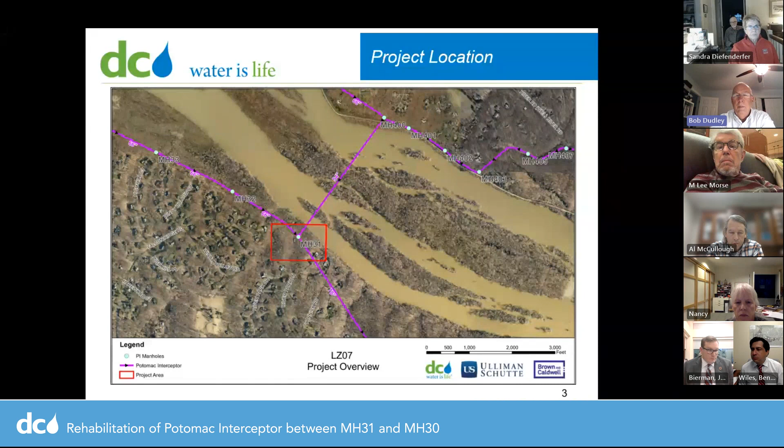I think everybody knows where we are, but just as a quick background - I know the river's dirty in this picture - to orient ourselves, coming from the left-hand side on the Virginia side of the river is a 66-inch line from Loudoun and Fairfax. Coming across the river from WSSC is a 54-inch, and then emanating from that spot southward is a 78-inch that quickly transitions into a tunnel. The site is highlighted here inside the red box on the screen. Next slide, please.

So what were we doing? Again, we've been with you guys for a bunch of years going through where we are, so some of you have seen this a bunch of times, some may not have. The 66 coming down from Loudoun is up on the left-hand side. Coming in from about 2:30, 3 o'clock is the 54-inch from Maryland, and exiting out at the bottom was the 78-inch.

A bunch of internal investigations performed by DC Water had indicated that the pipe was deteriorating, and the intent was to come in and replace it. We'd come up with, working between the contractor, their design build team, and DC Water's team, an option to do this in the dry. If people remember, the next manhole downstream is over a mile downstream, so bypass pumping is not something that could be achieved during the work.

So the idea was to build a box on the top manhole, we're calling that manhole 31.5, and divert over to the circular area in the middle over top of the 54, and then lastly convert that back into the 78-inch pipe just before it goes into the tunnel and heads on from that spot. We've been at it for about a year and a half, somewhere in that range, and pretty far along with about 6 months to go. Tijuana, next slide.

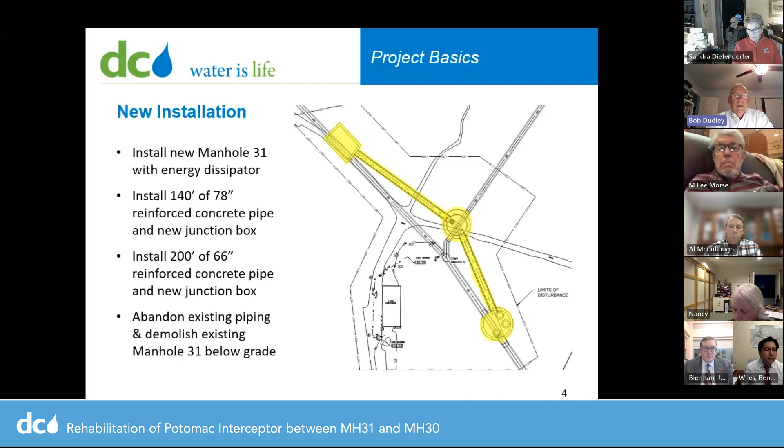When that first happened, we got alerted by the folks on site, and DC Water's team and everybody got together. One of the first things completed was to follow the emergency response plan. DC Water had, developed with the design build team over a couple years, a robust emergency response plan to be used anytime there was an emergency on the site.

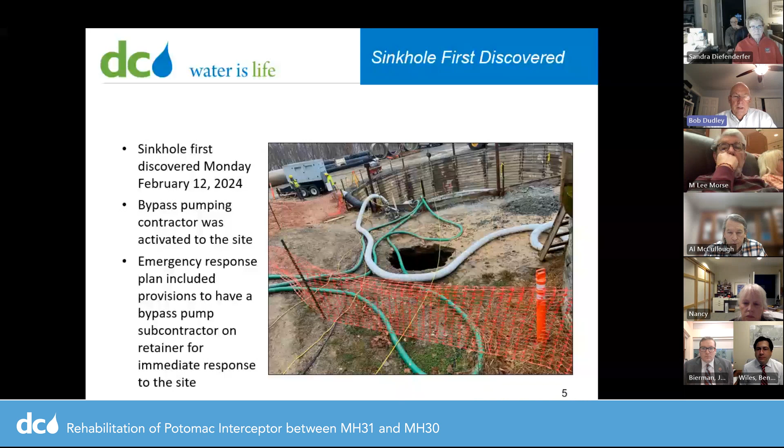Can you jump to the next slide? One of the cornerstones of that emergency response plan was to have retained a bypass pumping contractor. For those in the engineering world, if you had an emergency tomorrow and just called up and said, I need an emergency bypass pump, that's probably not happening. But DC Water had put them on retainer, actually paid them on a monthly basis to have them available for a failure. So one of the first emergency things that happened right off the bat was to get the emergency bypass contractor on board and out at the site, and they immediately were getting engaged.

So now I'm going to pass it over to Al. I think the next slide's passing over to Al, if I'm correct. Al's from Ulliman Schutte, directing the work on the site.

Good evening, everyone. As Bob noted, on Monday our crews first noticed this sinkhole, which immediately put us into an emergency situation. It was not located over an area where we were actively working, but we identified that this is a very risky situation, and we immediately began working around the clock with a focus on securing this situation while protecting our neighbors, the environment, and our people completing this work. We've been working around the clock since that time.

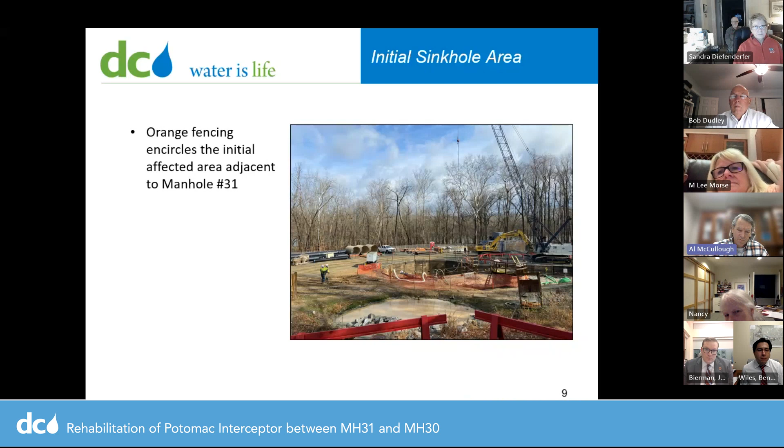See if we can roll to the next one. On Tuesday night, the situation remained fairly stable Monday into Tuesday, and on Tuesday we started to see a little more degradation. On the night of Tuesday the 13th, we got a lot of rain in the region overnight, and the flows within this pipe increased overnight. Our actual high flow period is approximately 8 till midnight, and then it starts to slow down. During that period, we started to see much more degradation, a very unstable excavation, and scour of that water, removing the subgrade, removing soil, and collapsing soils, which is a very unsafe situation and unstable excavation.

By Wednesday, there had been continual areas of collapse and some more failure. We started to see some water trickle into our excavation, but we were able to remove some obstructions on Wednesday. We were able to install some trench boxes, which are for slope stability, into that water area. You can kind of see in the picture just how big that area had grown to. So we had attempted to reach a stable situation on Wednesday.

Overnight, Wednesday night, which is—let's scroll to the next slide.

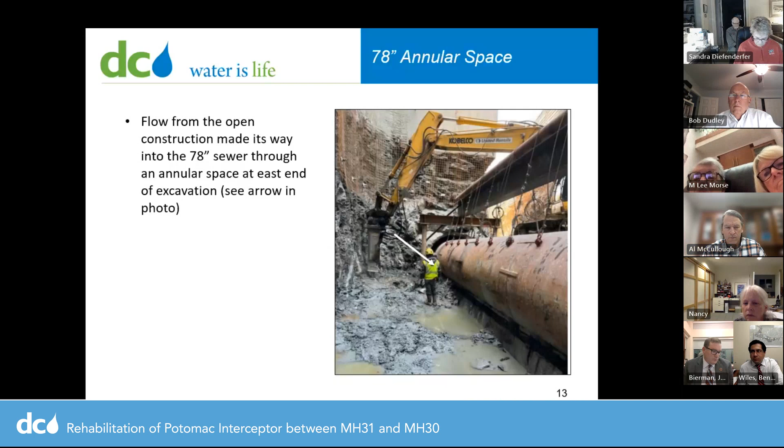And as Bob noted, that area is where we, as a team, developed concerns and wanted to share those with you. Let's see if we can roll—pardon my graphics. At one point in time, that white arrow pointed towards the annular space. I don't know what happened.

So that was our situation developing on the water. I will step you through our response so you understand what we've been working on.

We have been working to get this entire pumping system installed since Monday. That's the day we recognized it and initiated the response, and it's obviously a very significant response to get this type of system installed.

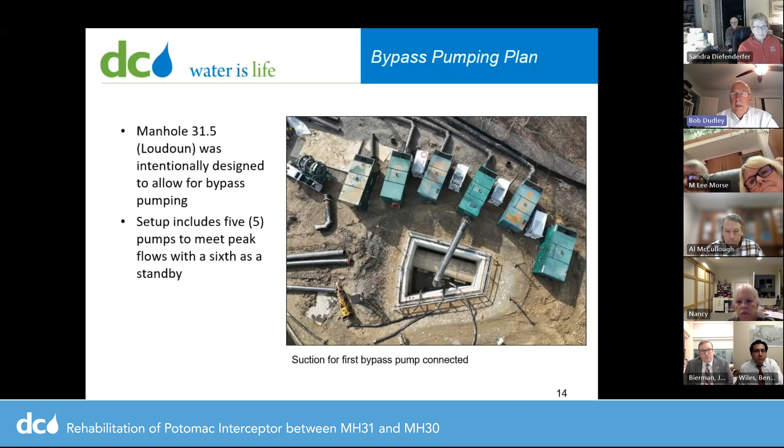On the discharge end of the pipes, that is where more of the challenges have occurred. This is a slightly confusing photo, I acknowledge, but it's a challenging situation. The pipes kind of zigzag across the site. Those are the discharge pipes of these pumps, and we have to route them around the upper slope.

We've actually built a steel bridge out to the top of manhole 31. We removed the lid of 31, and these pipes are being discharged down into the cylinder of that manhole. We've had to install 5 of these black discharge pipes and stack them all within that manhole. That's been a process—as each one was completed, we developed one more pump system of capacity.

We're targeting a total of 5 active pumps. As of the 18th, 3 pumps had been completely installed on piping and tied into this manhole. We were able to start a small cut in the pipe to induce some water into that box so we could start running these pumps and developing a run history with these pumping systems.

Because when we remove that pipe at that box we just looked at, we are very much an active pumping system at that point—we're relying on the system. We have completed a 4th pump over the weekend, which gets us about as far as we can go at this point. The 5th pump has to be installed and finished after the pipe is removed.

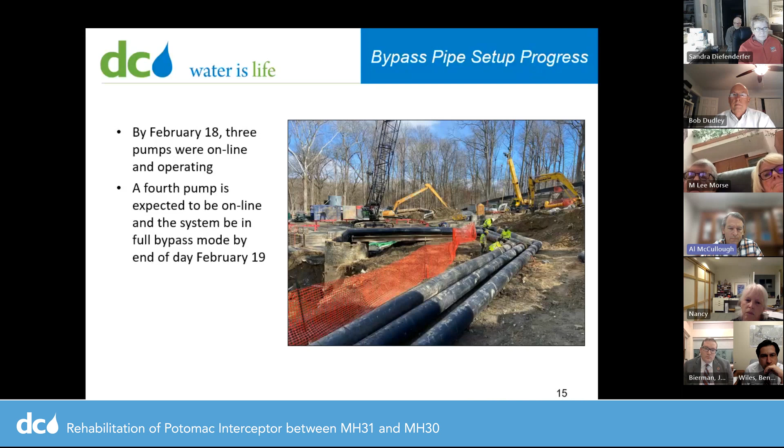This is now what the area looks like at the pump suction. We have installed, it's hard to count, but there are 3 of the suction pumps included. We are continuing to allow more water to leak into this box to allow these pumps to slowly come up to speed.

Slowly starting to remove the water from the system, and ultimately transitioning to where this becomes an on-site pumping station. That is a slow process to allow the pressure to slowly relieve into this box.

We're actively now working to continue to switch over to the full bypass capacity. It's a very slow process. We'll be continuing that overnight.

I think the fourth pump should come on in to be positioned and ready to be added to the fleet once that conversion happens. We're anticipating that fourth pump being in place by end of day tomorrow.

That would get our full bypassing system into service, which would alleviate the water flowing that we'd seen in some of those photos flowing through that excavation. We then move into the next phases of remediating that area and providing more stability and assuring a safe operation for all involved.

Bob, I could talk for days, but I'm sure people want to hear more stuff, so I'll hand back off to you guys. It's heading over to another Bob.

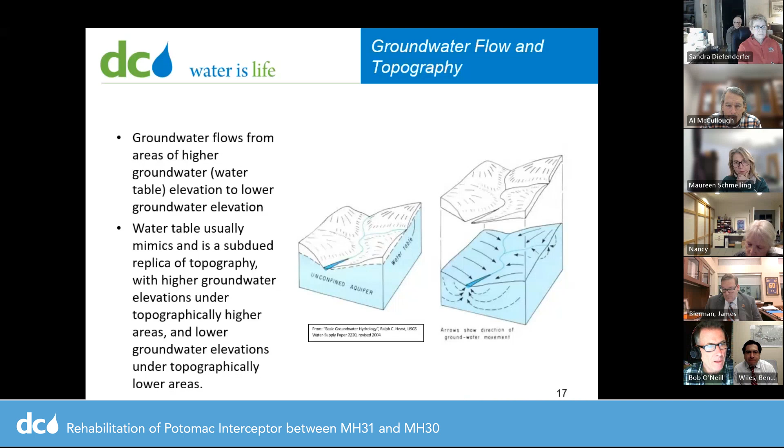Right after this, we got available to us well completion records for residential wells that have been installed and are used in this area. If you could go to the next slide, please.

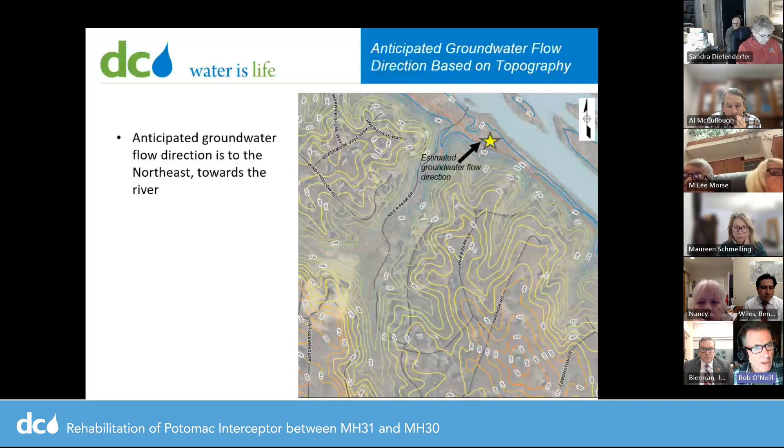So we looked at the well completion records—this is information that the driller puts down on a well completion report after they're done drilling a well. It tells you well depth, how deep the casing is, things like that. One of the pieces of information they ask for is what's called a static water level in the well.

After they're done drilling, they let the water equilibrate in that well. It gets to a certain point and stabilizes—that's our static water elevation, and they report that in the well completion report. It's basically a depth: if you took a measuring tape from the ground surface down, that's the distance to the top of the water table, or the groundwater surface, under non-pumping conditions.

So we took the ground surface elevation and subtracted that depth to water, which gives us a groundwater elevation at those points. This is the data from that, for the wells where it was available.

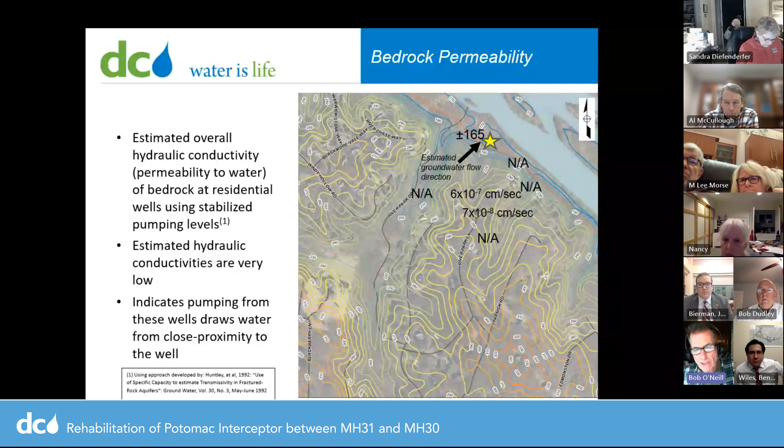And if I could go back to the point I missed, and I apologize for this - if I go back to the other slide. Actually, can you go back two slides? Yeah, so this is the slide I showed you before. This groundwater elevation was from before the release. We're seeing the groundwater flow direction go here.

So groundwater continued to flow towards the northeast. It didn't get high enough where it would have caused a flow reversal. And now that that water level is being drawn down again, it should return back to normal conditions.

So really the takeaway is groundwater flows towards the northeast, and even during the incident, the release did the same thing. The residential wells out here don't draw water from very far away from themselves, because when they operate, the water level drops down so quickly, that indicates that they're pulling water in from very close, and it doesn't pull in water from far away. So that's a summary of what we evaluated.

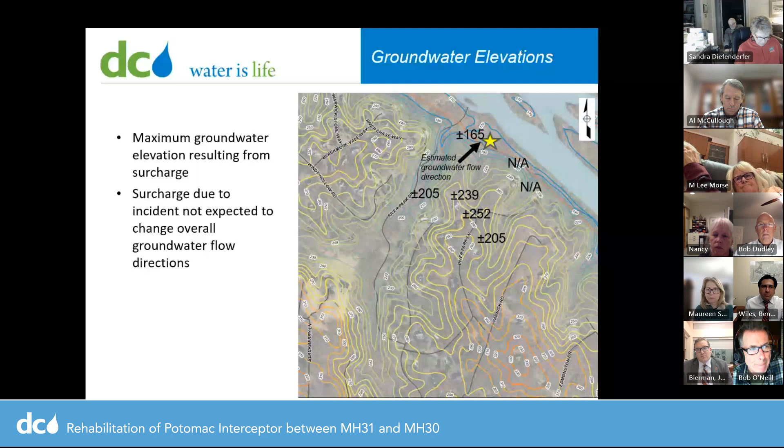So just want to talk about the sampling a little bit. Two years ago, before we started construction, back in 2022, we had collected samples from 6 of the properties around the area based on that topography. We had these 6 homes that we collected before this construction, just to get an idea where we were with coliform and E. coli. E. coli is a subset of coliform that's indicative of sewage. Basically, if we were to find E. coli, that would be an indicator that you have a sewage contaminant.

Then, following this, when we realized we had a potential for the sewage to get into the groundwater table, very concerned, obviously, so we contacted you all and collected samples on Saturday the 17th, and also the 19th. And I believe we were out again today collecting samples. From the properties, they all came back negative for coliform and E. coli. We did have one home where we collected from an outside hose bib, and that home was positive for coliform, negative for E. coli, but that had happened both before, when we collected in 2022, and then after here. So basically the results were very consistent between before construction and now.

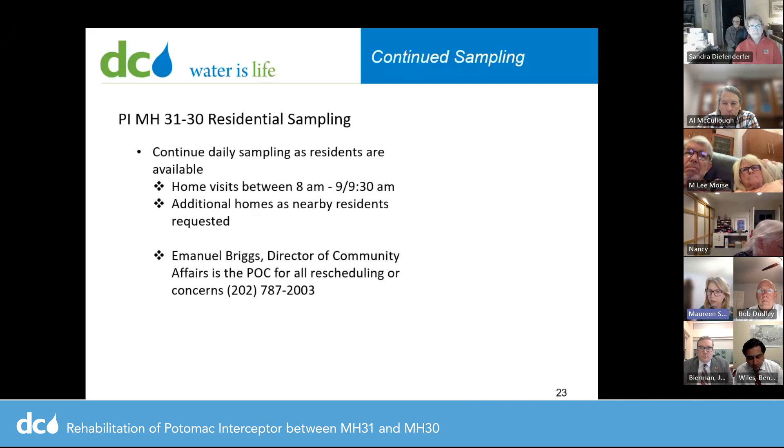All right, next slide. So just want to note, we'll continue sampling daily. I'm sure Tijuana and Emanuel have been in contact with you. We're doing daily sampling right around between 8 and 9:30. If additional residents on this call want to request sampling, please contact Emanuel Briggs. If you're concerned that something has happened with your well, please contact him, and also if you need to reschedule, we will continue the sampling. Once we contain the site and get the water pumped down, then we'll just continue for another week or so, just to make sure everything is good with the water.

And with that, on to outreach. As many of you know, we've been doing lots of outreach, and you've seen enough text on the slide, so I want to spare you another slide with words. But as many of you know, and to reiterate what all of us have been saying throughout this entire presentation, we take these things very seriously.

So, as was mentioned, we have been working diligently with Fairfax County elected officials. We've been having internal meetings, day and night. Friday till almost midnight, Saturday, Tijuana and I were walking the beat throughout the neighborhood, bottled water was being delivered, and water was being sampled, more meetings on Sunday and more discussions today. So we do take this very seriously in all of the outreach we've been doing, also doing lots of calls to customers, knocking on doors with customers. On the slides coming up, you'll see my email address. You can also email me if you have any concerns or want sampling to happen at your property.

But again, all the information we've been providing to you could not have been possible without, one, the coordination internally, two, the coordination with Fairfax County, but first and foremost, most importantly, coordination with you, the community. We certainly care about you. We want you to know we are your community partner in the district, and we have infrastructure out there. So we want to make sure your services are optimal and up to par.

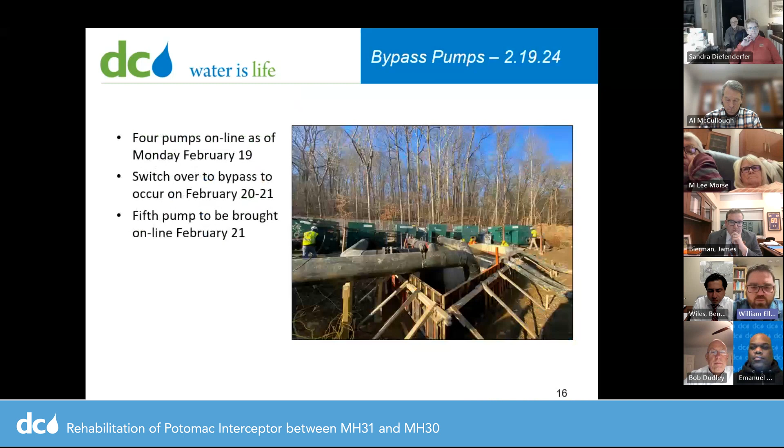Will, do you want to expand? Yeah, Tijuana, can you go to slide 11? And while she's getting there, my name is William Elledge. I'm the Director of Engineering at DC Water. I'm responsible for the planning, design, and construction for all of our pipeline projects.

So the question is when. This slide really defines it. If you can click to the next one, it shows the wastewater inside the excavation. This moment on Thursday morning, seeing that wastewater there, is really what defined the risk, a potential risk. We were acting out of an abundance of caution, and as we've seen with the test results, there were no positive results for E. coli. The risk really came about when this event happened, where we had the wastewater sitting on top of that fractured bedrock. That was the moment we started rolling out that notification.

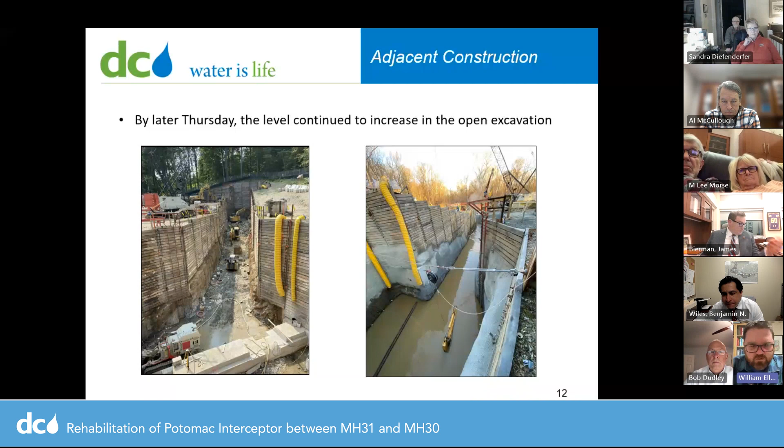Looking back through the chat, Tijuana, if you can go to the slide that shows the red boxes around the properties, around slide 22. Yeah, there we go. Basically, as Bob, our hydrogeologist, was describing, all of the groundwater is generally flowing in the direction of the work site anyway. So it's basically a series of concentric circles around the work site as to who was identified for the original testing. A couple years back, before the start of construction, those homes were also selected for that baseline testing in coordination with DEQ.

All right, thank you, Will. So this is Peggy, I'm the box closest to you, 103 River Park, and we were notified. I agree with the county official. We can see your site from our house, and we knew something bad was happening because on the 13th you guys started working all night, and usually you notify us if you're going to do night work. So I'll tell you, we were pretty nervous because either you guys were way behind schedule or something bad was happening. I think it would have been appropriate to notify the locals about what was going on, at least in the county. Thanks to the county for coming out on Saturday morning, by the way, that was some impressive response when I know you guys weren't scheduled for that.

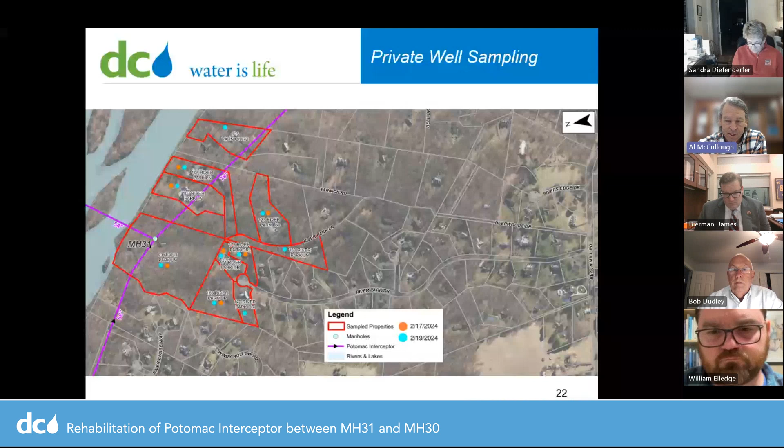Al, do you want to take that one? Yes, obviously it is going to impact and is slowing our work. We've stopped work on everything outside of this, focused on this particular portion of the site. We have to continue focusing on this bypass system, stabilizing that area, and ultimately dewatering the excavated area. We have to confirm it's safe for our people to then start entering that area. We would love nothing more than to get right back to work, but it's going to take some time to do that safely and be sure we're not putting ourselves into a risky situation. Of note, the Maryland line is still active coming through this area, so we are proceeding cautiously to not make the situation worse. So it is impacting us. We are looking at ways to overcome that and speed up completion of this infrastructure, but it's not helping us get done faster.

That said, one of the things we plan on doing as a team, once it's stable, is to get back together. None of us want to continue bypass pumping for six months, so we're going to collectively bring the team together to discuss other options to expedite the work, and do other things to bring this online quicker, so we're not reliant on the local temporary pumping station for the next six months.

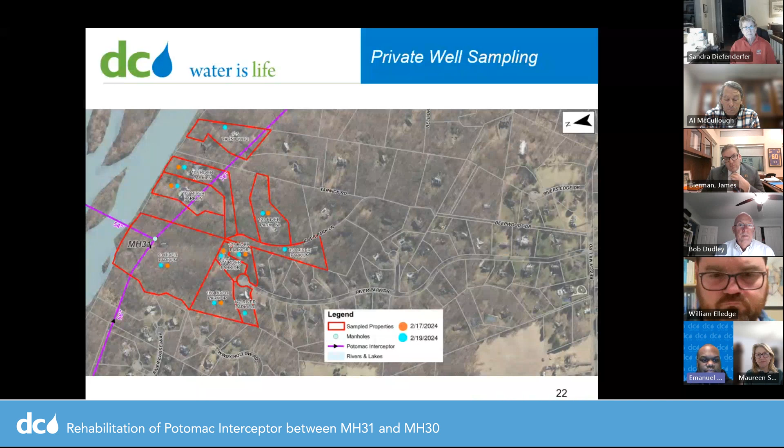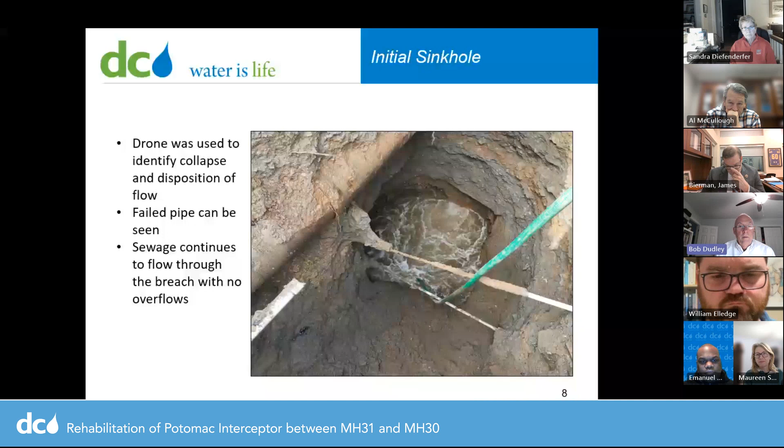Hey T, can you get us slide 8, please? Yeah. Couple more - maybe I got the wrong one. It's the void location. Bingo. You had it, you had it, there you go.

Okay, so the next question - is there a danger of more sinkholes? Yep.

Who's beating you to the punch, Emmanuel? So from manhole 31, if you see the word drone, there's the manhole just above the E. To that point down to the far right, past that box, DC Water and Al's team slipped a 72-inch steel casing inside of the existing 78-inch, which was interesting since we were constructing that box over top of the existing 78 - everyone was worried about the quality of the pipe and we did not want it to collapse in advance, so that's why the 72 was slipped in advance. From the left, from that E, that's what failed, and we did not intend on using that anymore. So the only piece left of existing pipe is the small piece coming from the north at that picture, around 12 o'clock. Inside of their excavation, which is that circle there, it's in quite great shape, correct, Al? But there's 10 feet there that we don't know what condition it's in.

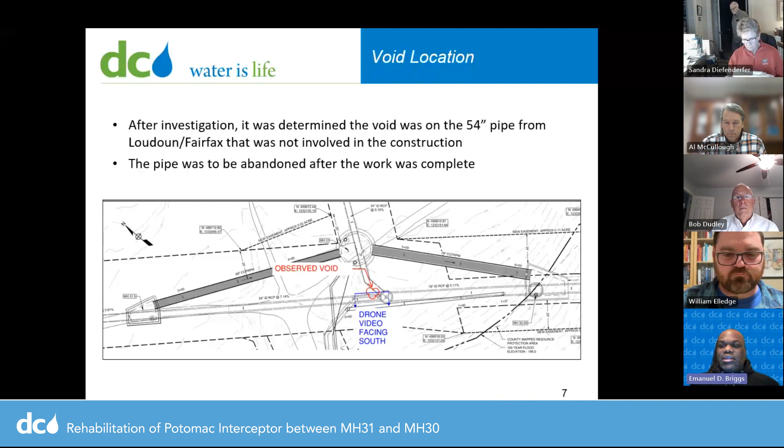Emmanuel, you have those? Yes, the list of questions - I did get those, and we'll get back to you with typed up responses, Peggy. But I do have that list. Great, thank you.

Emmanuel, could you share those responses with the group? I thought those 8 questions were great questions. Sure, that's fine. When I get the responses, I can certainly share those, because I'm sure other folks will want them as well. No, they were great questions.

The other thing, I think Peggy inquired about this, but I think you indicated that a recording of the call would be available. Is that correct? Yes. And how will you make that available?

We're gonna figure that out, because of the size of it. Sometimes we put it on like an MP4 version and have it on a shared drive and give folks access to it. We'll figure it out. Okay, but if you can share it in a way that it can be preserved, especially in my case, I may need to talk to prospective purchasers of the lot right next door about all this, and having this content could be helpful in that dialogue. Yep, understood.

And you'll let the group know how that can be accessed. Accessed, okay, yep. Thank you. You're welcome.